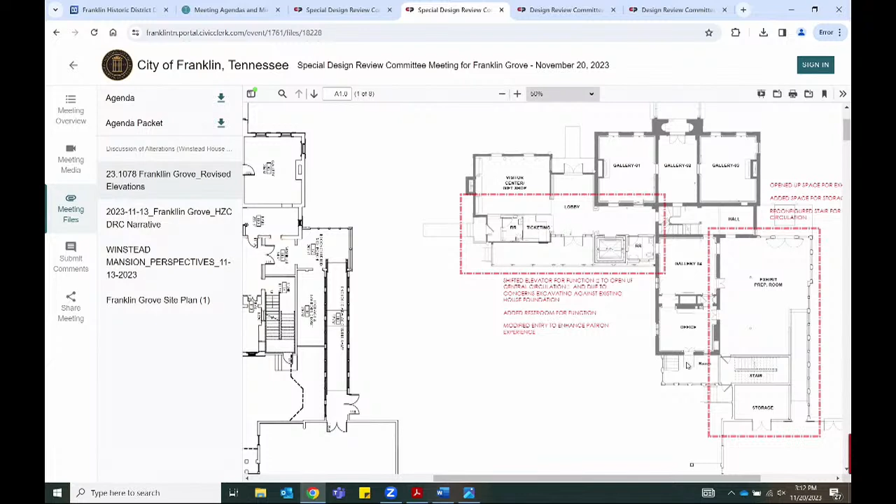Any of these changes are also made on the recommendation of our museum consultant who we've engaged. He's a gentleman with deep experience with the Museum of the Native American and the Smithsonian. He's dealt with a lot of these, so he's talking us through how they're going to move exhibits through once something gets there, and how they unpack it.

That old circulation was just not going to work. I think it was going to prove to be a very big challenge, and I don't want to give somebody a new building they've invested a lot in and have it not function the way it should. We opened that up, rotated the stair to give more space and open that ramp up so it didn't feel like such a tight corridor coming through. So that's what drove the proposed changes there. Then we added a storage space as well. But really those floor plan changes were all functionality and circulation based.

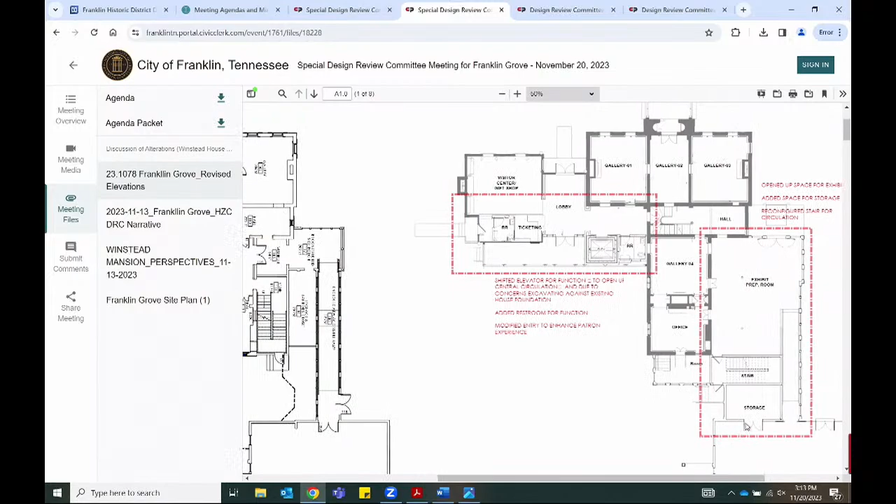Brandon, is this all new construction? That piece within that rectangle, yes, that'll be new, and that's what it was going to be before as well. We had the ramp and the sun porch off the back, so we're not proposing removing anything that wasn't within the original proposal to remove.

You're really just reconfiguring the inside floor space. Yes, sir. The skin moved a little bit, but appreciably not. We're not adding a 20%, big chunk of space at all. It's nothing of that size.

Okay, you want to comment on that as we do it a piece at a time? I wanted to ask a quick question while we're here. Is this new exhibit prep room going to be seen if you're looking at the front elevation? Will this protrude from the side? It will, and it will look the same with the exception of the doors, since there was a drive there in the site plan. At some point there were going to need to be doors there, otherwise why have a drive? But those will be glass doors.

So that was conceived of as kind of a recreation of the sun porch that had been on there previously. I know there was an image that showed that. It'll have the same look, glass doors, that same feel. You'll see the same thing basically that you were going to see before. I think that's on one of your elevations, right? Yes, sir, it should be on the front elevation, the first elevation sheet. This is all ground floor. Yes.

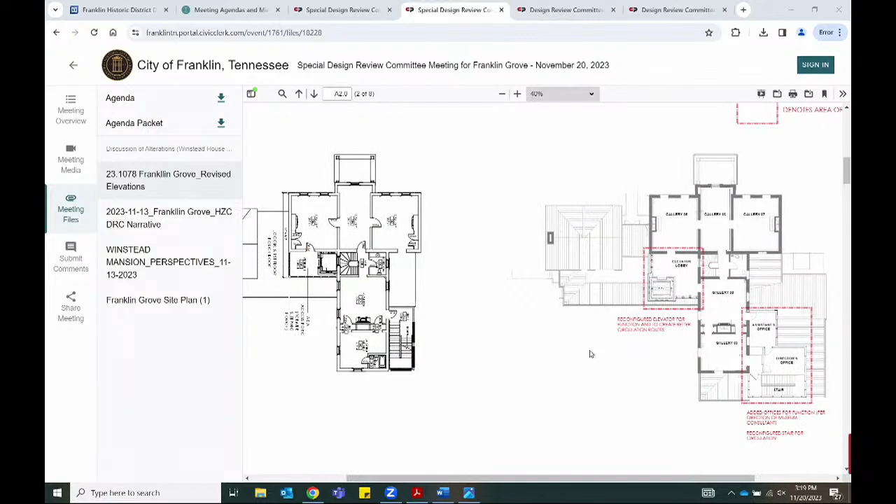Okay, can I make a comment here? Aesthetically, it's not coming across - it's very utilitarian looking right now. Do you want to pull the elevation up? The old elevation had an arcaded area, and this is just very straightforward. Is there anything you can do to make that more aesthetic?

Are you talking about where the double doors are, on the front or the back? Part of that may be the drawing - we kept those arc pieces are still there. The line weight may not read as well, but on that back porch we kept all those pieces. You're right, it's not reading very well. But it's still bigger. It is hard to read, but the aesthetics of that rear porch are very similar to what was there before. Like I said, it looks nice, it works, didn't want to mess with that.

Emily, do you have any comments on this? I did want to comment on this addition here. I pulled up from the previous COA the historic photograph of what was submitted, what I believe was originally there or added, and then demolished, and then proposed to be added back. So the intent of the past COA was to add it back, and it was approved - even though the guidelines say porches should not be added on highly visible facades, since there was photographic evidence it was voted on and approved, because while it wasn't an exact match, some of the massing was the same.

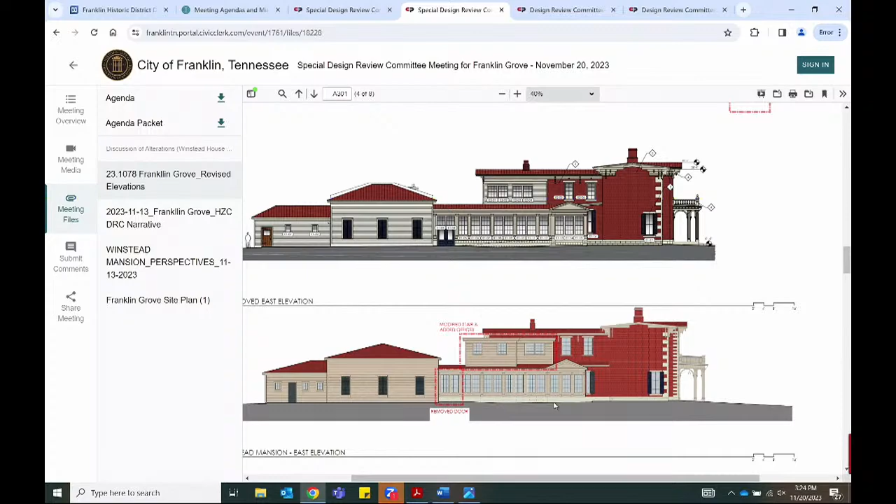It would just... You mean the pediment that's over the windows you're talking about? Well, I guess those windows would have to become, if that's going to be a door, you'd have to rework that piece to fit a door within that pediment. But that would work with the truck? No, it wouldn't work - the truck can't make that turn to deliver there anyway.

You're trying to get the doors off of the front facade, Brian? Yeah, that's what I was thinking. There are a lot of doors on the front, and you kind of want to have your main entrance, and it does mirror the old photograph to not have doors on the front.

I think it just adds a little enhancement to the front elevation to not have doors. That would have been my preference. And we're up against a property line there as well, so that end is tight.

What if we were to make those doors look more like a window, meaning the wood would come up so high and match the base? That's what I'm thinking. I'm thinking it's probably going to be a custom door anyway.

Want to zoom in on that, Emily? It may help, because we really tried to - you're really not going to want to drag stuff through the front door.

What I'm thinking on that elevation is that the base of those windows would come up to match the previous elevation, so it looks like it's the same elevation and those look like windows instead of doors. Absolutely. Emily, can you show that old photograph again?

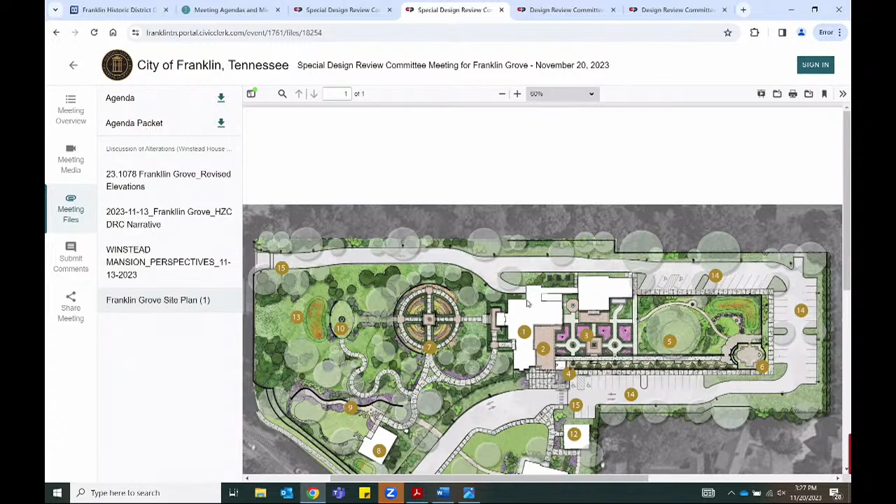So that little offshoot - okay, I see. Is that existing today? No, that's all new. I mean, there is a drive there, but I'm guessing they're doing some level of repaving. I don't know if that little offshoot is actually there. It may be - the offshoot's there, but it just continues on around.

That's a service entrance right there, basically, the way that's drawn. So that was planned to be a service entrance before, and then it just got to where doors were not put there. There wasn't a door on the floor plan, but in the site plan, the drive was still there. It remained. And it seems for lots of reasons, the door on the side would be best.

Is there any way we can look, just kind of visually, if you have a drive running vertical and then making that turn? We can look and see what those radiuses would be. We'd also lose that landscaping that's in there too. Right, that's a good point.

My thought is you could back into that space and then just take it around the corner. I don't think this is major, just a thought. It just seems like it would get old pretty quick to have trucks backing into the front facade of this.

What's the intent of that door, that access? Is it to move museum pieces in and out? Yes. So you're not talking daily delivery. It's going to get used maybe four times a year, for exhibits. Change them out. Yes, ma'am. You're talking about four times a year whenever they bring a new exhibit, and that's probably at the most.

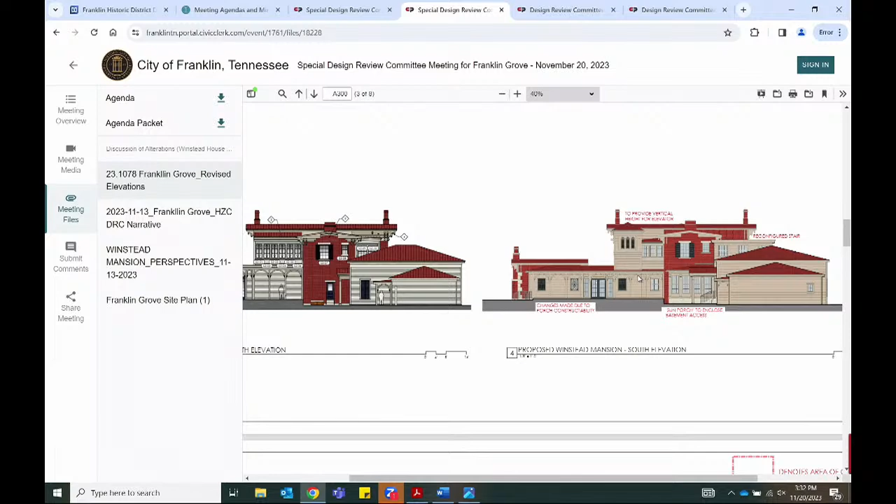My challenge was if I brought the whole height, if I ran it back, I was going to interrupt an existing roof line. I obviously do not want to do that. I was really worried that it would overwhelm if I tried to keep everything at that roof line. So I took just the piece around the elevator. You can see, if you want to zoom in, where that peaked roof, that little piece, we basically brought a vertical piece up for the elevator and then kind of came low and joined it with the windows to either side. If you've got that 3D, that may show a little better what we're proposing.

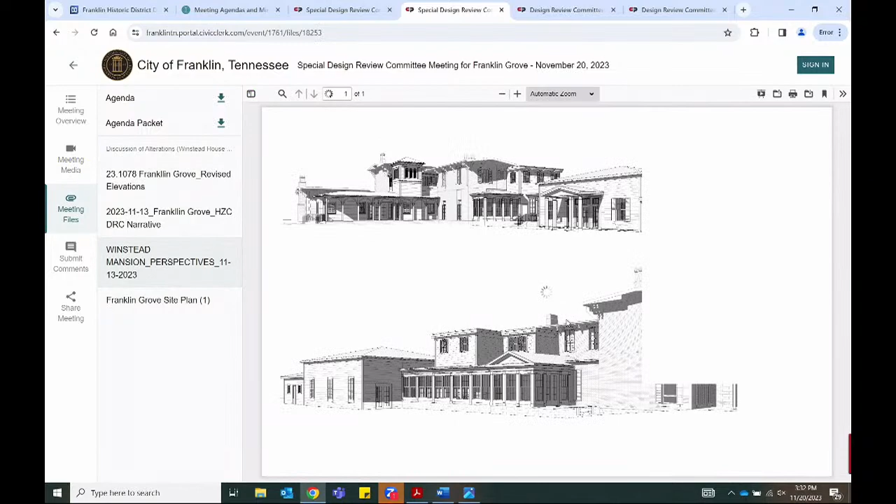I have a question. So the arcade is shorter in this new elevation than it is in the original elevation. Is that correct? Yes, that is correct.

And the reason for that being technical constructability. If you look at that elevation, they literally were showing you had the top of the curved columns, and you had about this much room. I didn't really understand how the roof was going to work, if it was going to slope and pitch, obviously we do that, it's going to bring it down, you've got to have framing. There was a lot that needed to happen there that they just hadn't gotten that far in design yet to account for it. So we brought it down. That height is still 10 feet, so you've got 10 feet clear on that porch, which I think will feel perfectly comfortable. If anything, once you get above that, if it's raining, you start to lose the functionality of your cover. If that cover's 12 feet in the air and you're only 4 or 5 feet deep on a porch, it's just not going to do as well. But I wanted to keep those pieces, we just had to make it work.

They've got to build it. So you can see this shows, I think, a little better than the flat drawing what we're proposing on that elevator. Again, it's certainly a different look. That was the best way I could come up with to deal with the verticality of that elevator shaft.

So let's go back to the elevator itself. So I know you said the previous architect didn't take that into consideration, the height of the elevator, or it was disturbing the foundation. I heard both. And that would be for like a pneumatic or hydraulic lift? This will be a hydraulic elevator, it's just 2 stories, so you will have to create a foundation for that. Yes, deep enough to accommodate the hydraulics, elevator pit.

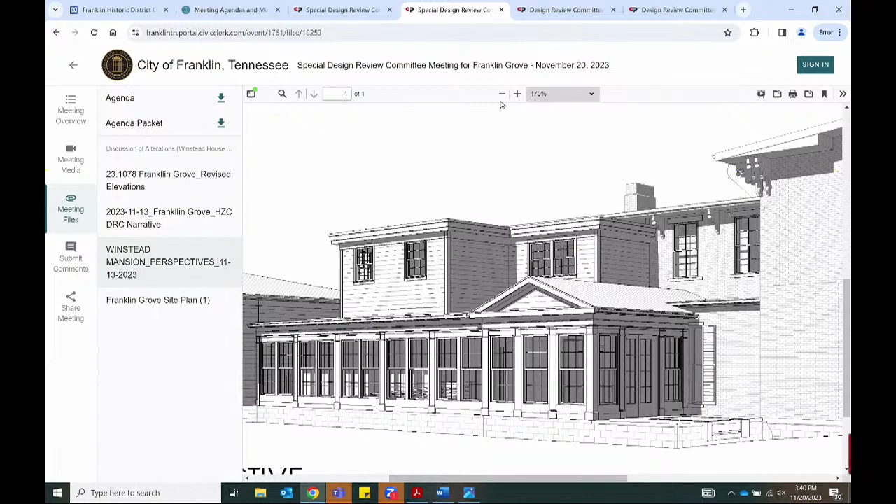Okay, and this piece backs up to the drive that goes around, so it's the least visible piece of the whole site.

And the boxy elements, they're additions, they're not there currently. Correct. And can I ask, will this be seen if you're looking at the front elevation, will this stick out any farther than this piece? No, it is set back. You can see the roof line where the shed roof pitches back, there's some depth between those two.

Emily, do you have any other comments on that part of it? No, we were just curious to see if it would protrude out if you were looking at the front elevation. That was the only thing we had a question on.

Brandon, before I forget, when you come back for the final, I would get some current photos of these different elevations so that we can better plug in, rather than just relying on memory, which mine is fleeting.

And the box elements, they are new office space, do I understand that right? The piece coming out to the left is a stair, the new egress stair, which was what was in there before, we just changed the position, and then the others are new offices. Yes, sir.

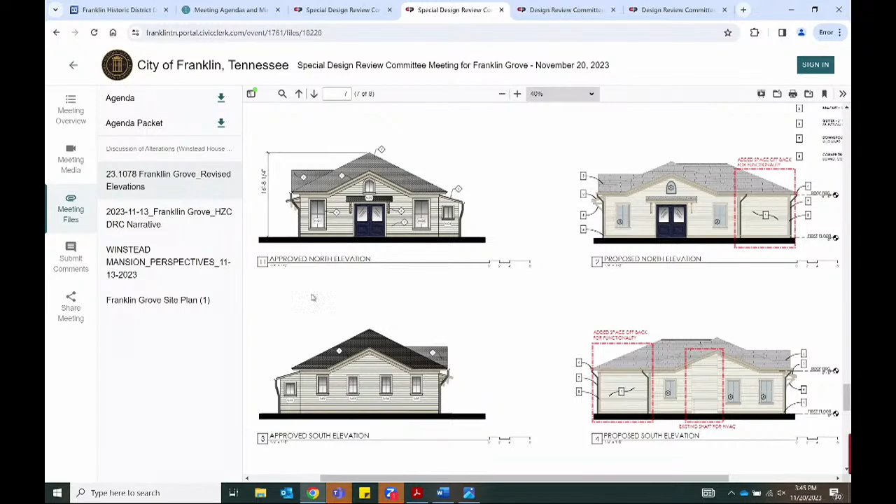Now look, that's number 12 on your site plan, right, on this legend? That's the number 12 piece, I believe so, yes. I want to make sure I'm right with the terminology.

All right, any comments on that? I have a question on the south elevation - is that a chase wall? Yes, it is. You're talking about the rectangle in the middle? Yeah. So it's an existing wall chase for the HVAC ductwork. Yes, and that's existing on the house now, we're just showing it and we'll clad around it to match everything else. So currently the ductwork is on the exterior of the house, of the carriage house - there's a package unit and then it comes in and runs vertically and then into the space. So the ductwork is not on the outside, but they built out, I can only assume, to enclose the ductwork. So that's currently existing, you're just going to enclose it? Yes.

Anything else? On the north elevation, Brandon, is it possible, even if it's a closed shuttered looking window, to have another window? You've got the chunk that comes out with... Oh yeah, absolutely, we'll add a window to that.

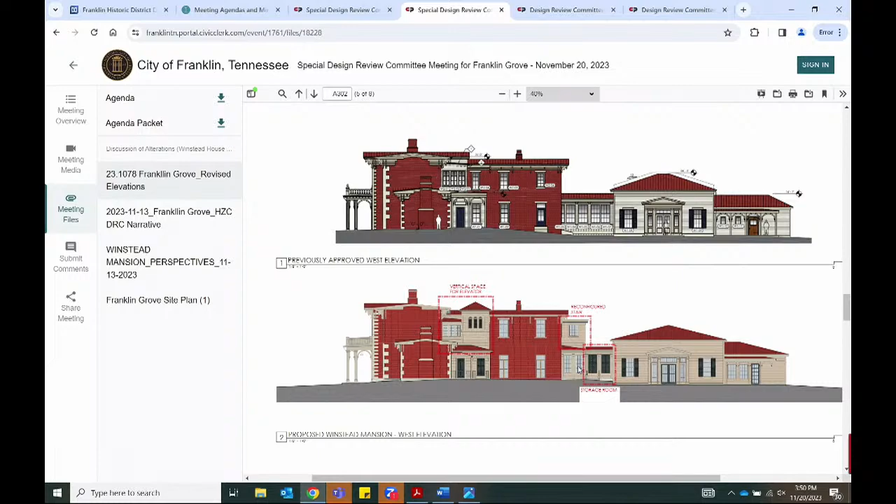You see the vertical element that the box addition at the top creates, which truncates that connector piece. And you've got that new sun porch piece kind of poking out in front of the connector as well. We just ended up with storage where those shutters are shown, so we looked at doing some faux shutters as opposed to full height glass into that storage space. But again, that was a plan thing.

If we needed to come back with glass there into that storage room, we certainly could. We may just have to do something to the inside, but if that look is important, we can maintain that look. I guess my thinking was as a joiner piece, it's not predominant in the experience of that elevation, but we could certainly go back and keep that with glass and just treat the inside of it, make it one-way, something like that.

What is the purpose of the piece that's disturbing that part of the hyphen, the second upper level part? That is the stair, where we repositioned that stair in the floor plan. You're looking at the other end of the stair. So we shifted the stair out to free up some space in that plan because the former layout created an awkward configuration, and honestly some spaces inside were long and skinny and not really useful. So we shifted that stair, but when we did, it kind of pulled it out past the face of that house. But bear in mind, that's set back quite a bit from the face of the historic home.